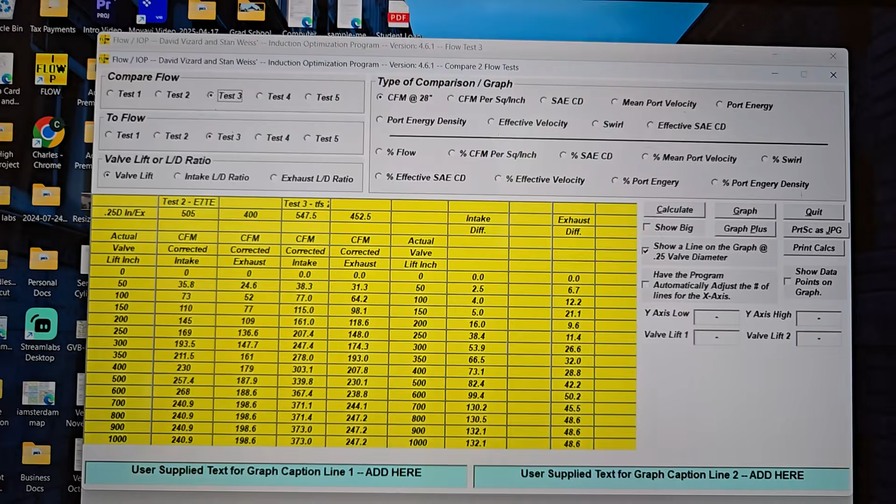Okay guys, we're going to go over Dangerous Donny's 540 TFS 270 CNC heads after I did a ton of work to them.

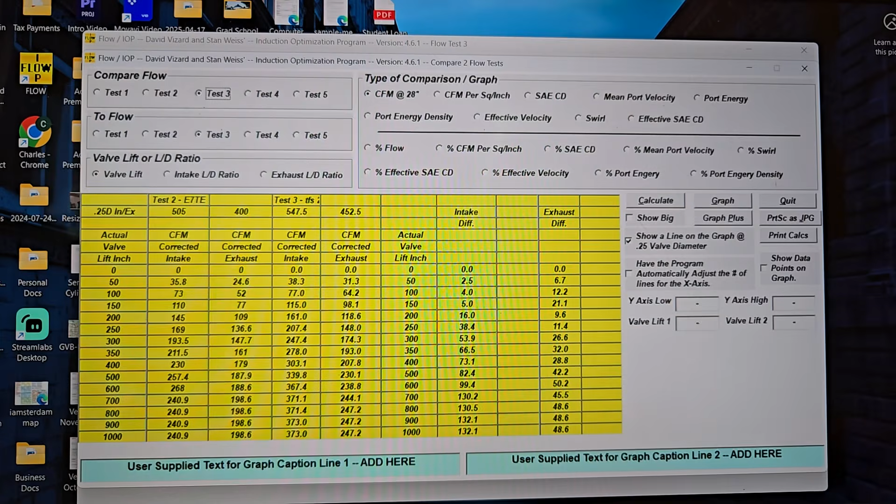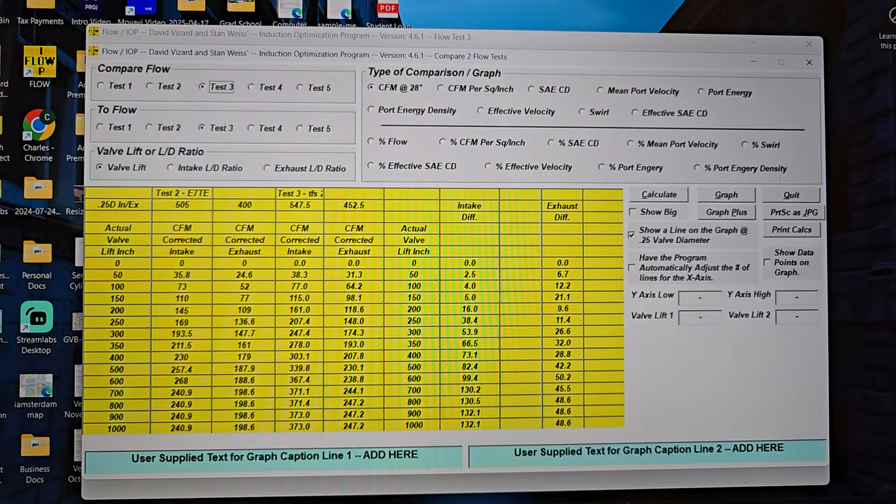I don't think I'm going to show you my page with all my measurements and details, but I just put a little too much effort into that to just give that away. But I will be showing you everything through David Vizard and Stan Weiss's IOP program, and if you're really sharp, you'll be able to get a bunch of info out of here.

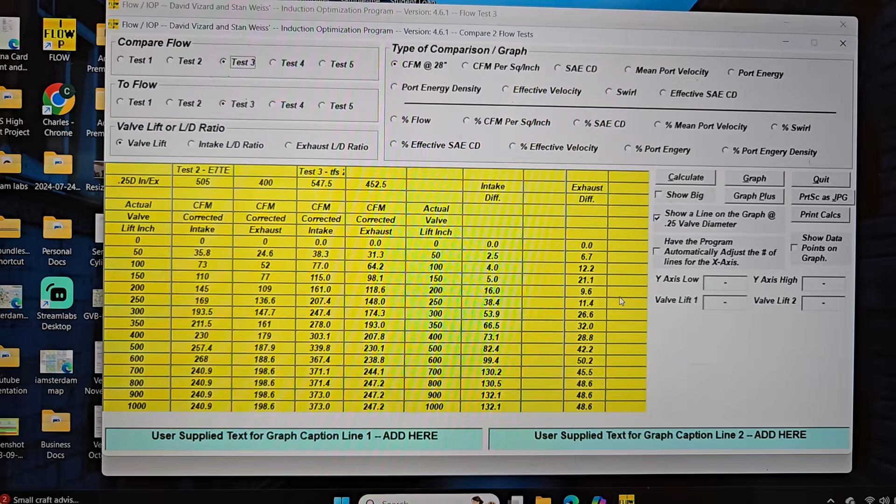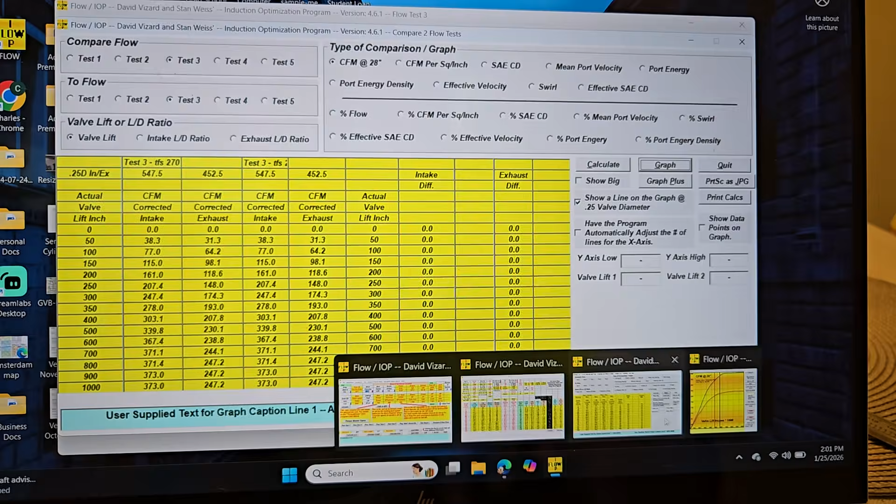So test 3 is Dangerous Donny's heads. We're going to take a look at CFM first. We're going to hit calculate, graph. Come on, you can do it. I think I have that page open already, that's why it's not coming up. There we go, okay, that's what we got.

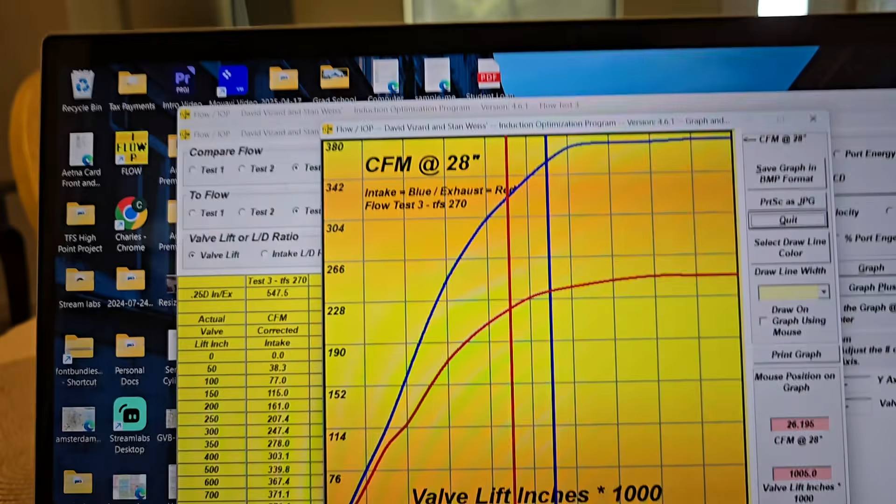And yeah, we're coming out. It maxes out at 373 on the intake and 246, 247 on the exhaust. Nice looking curves. Let's move on.

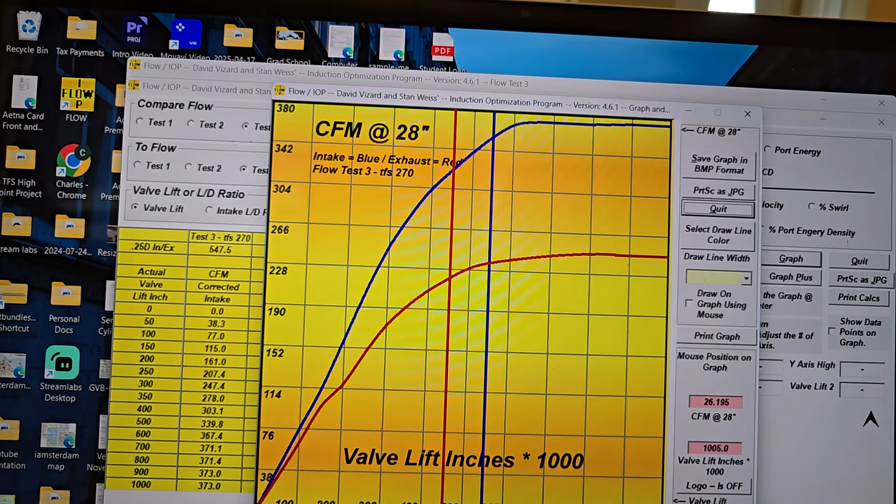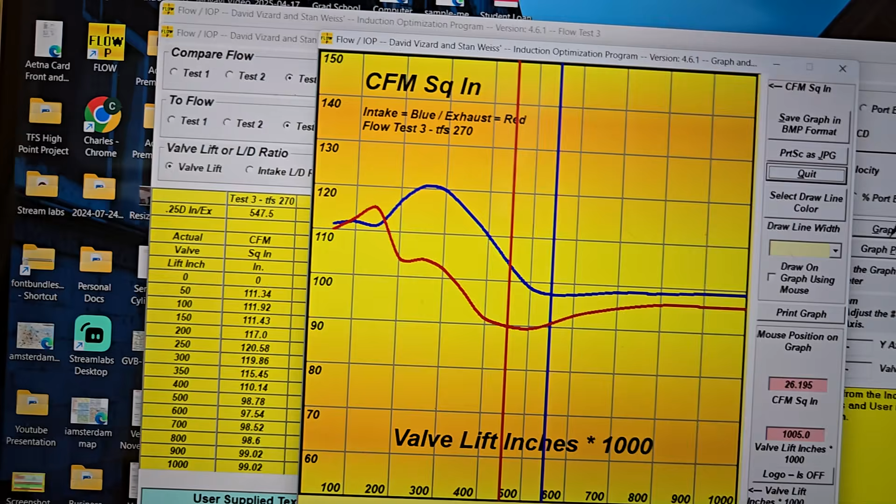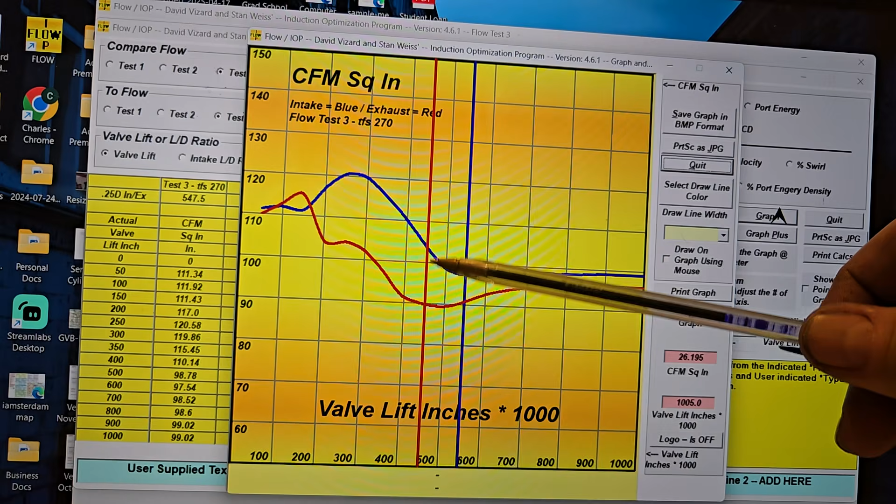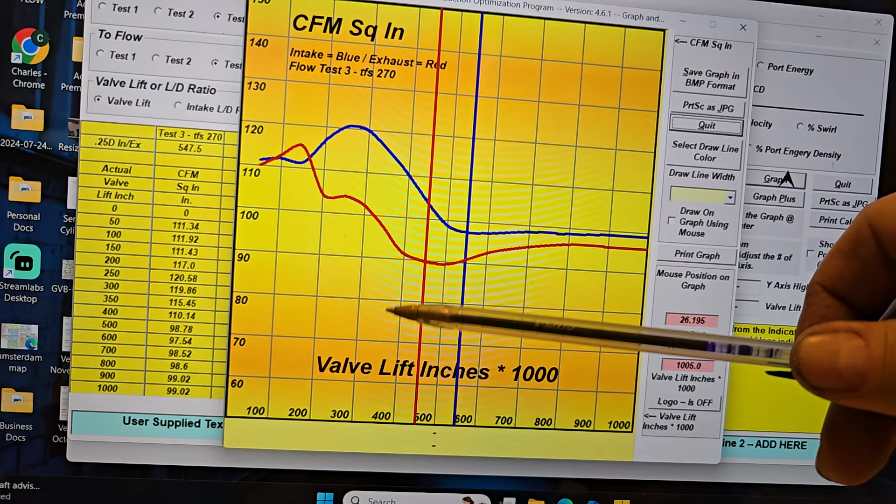CFM per square inch. Okay, that's going to tell us our efficiency. Anything over 100% efficiency is pretty darn good. We got a nice bulge between, we are over 100%, up to like 500 lift, right in the meat of the curve on the intake. We're doing really well. Okay, they do level off, but that's when the port's already becoming saturated.

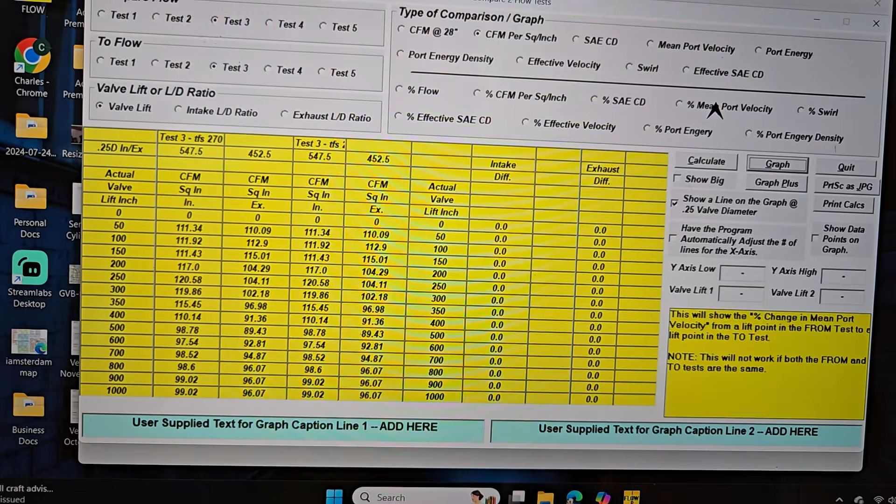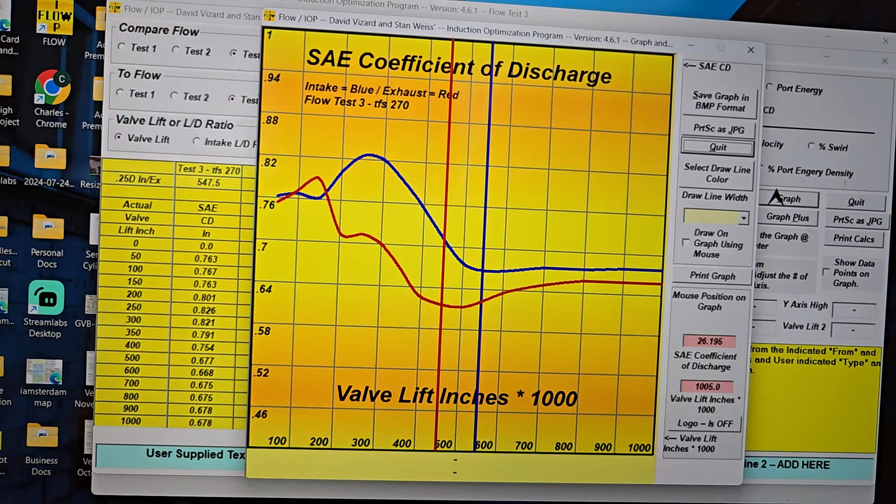SAECD, calculate, graph. Very similar curves. Intake turned out really well, the way I did the bowl and the seat, after I had some issues with it.

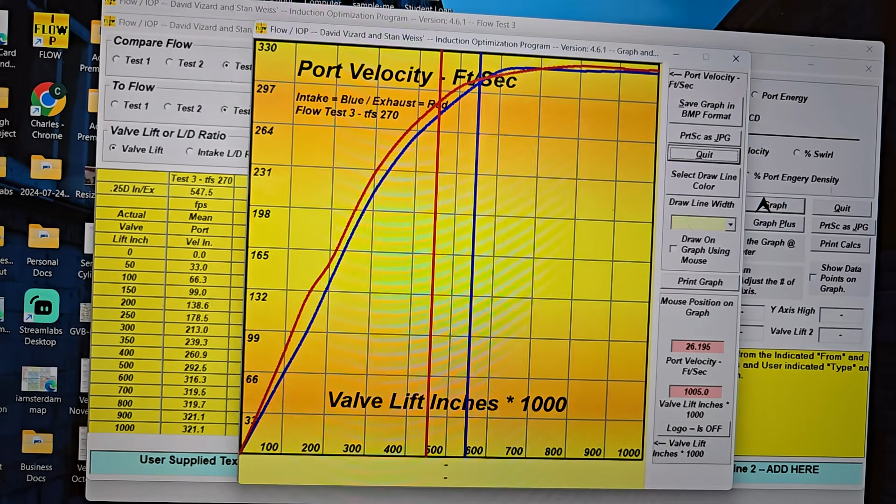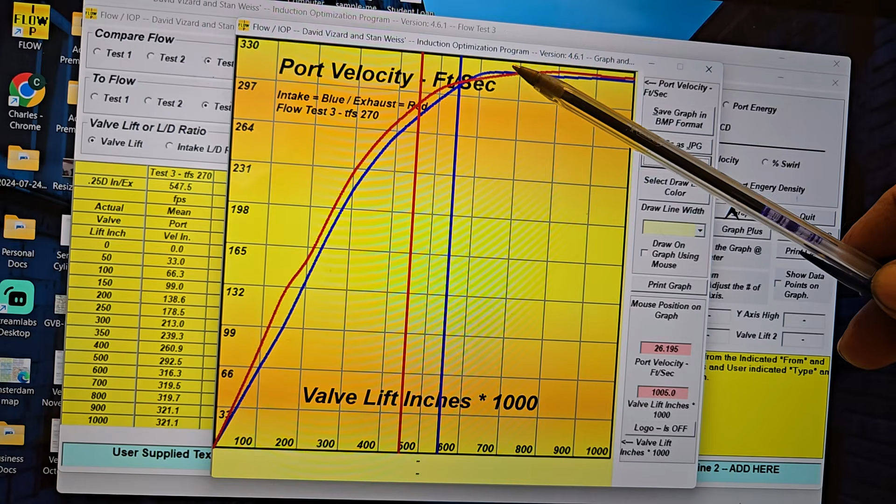Mean port velocity, this is pretty interesting. DV likes 300, 300 is here. We're quite a bit above that on both ports. Really good curves on both ports. Intake's a little bit fast because it's relatively small for this size engine.

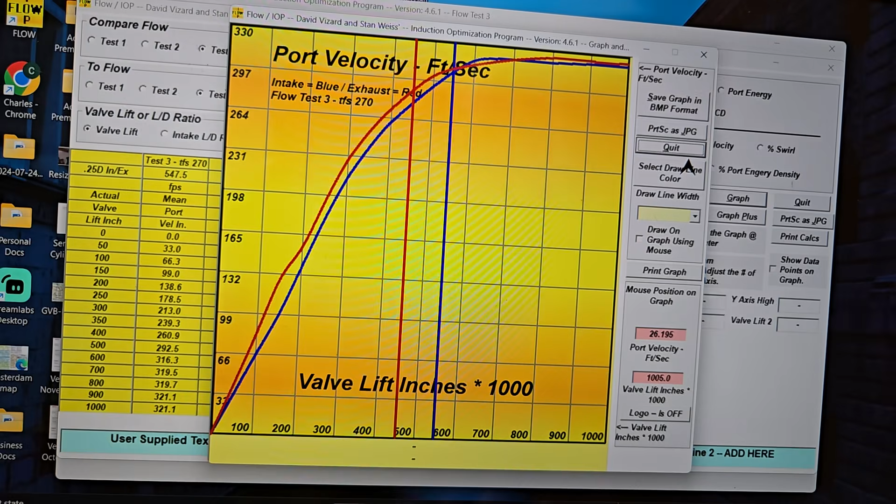Will that limit our top end? I'm going to say I don't think it's going to limit it as much as a lot of people think it will, because I worked on getting the airspeeds in the port pretty efficient even at high flows. So I think it'll carry, I think it'll carry the RPM. We'll find out.

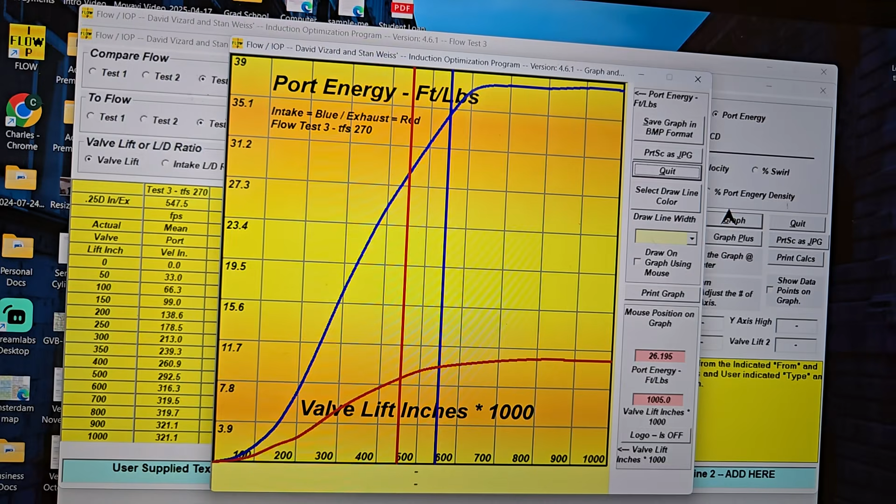Okay, port energy. To be honest, I can't remember a port that had 39 foot-pounds of energy per foot of port length. I'm going to guess that's good.

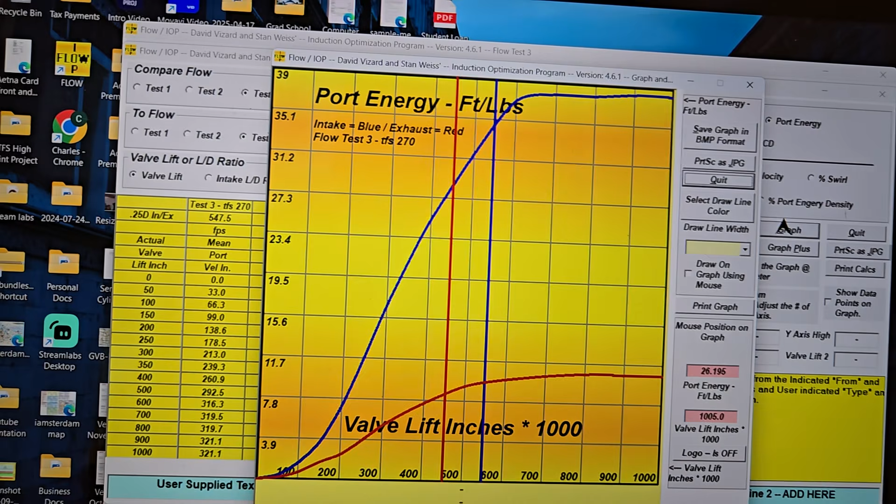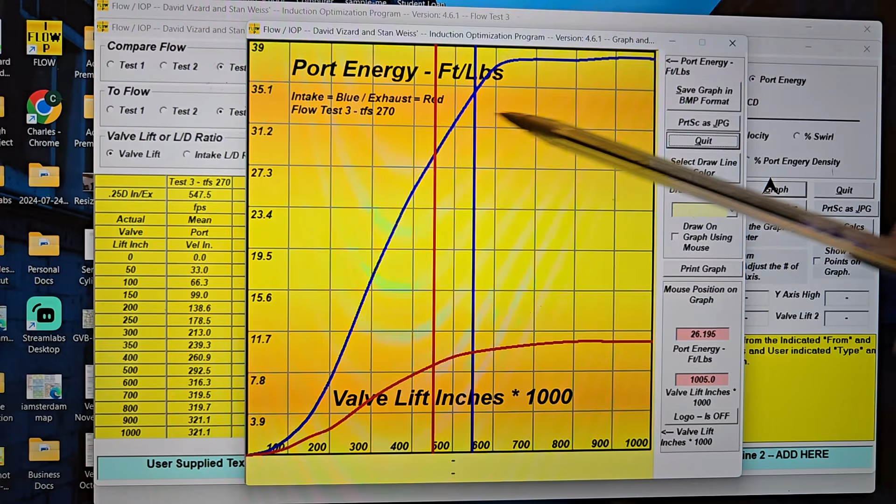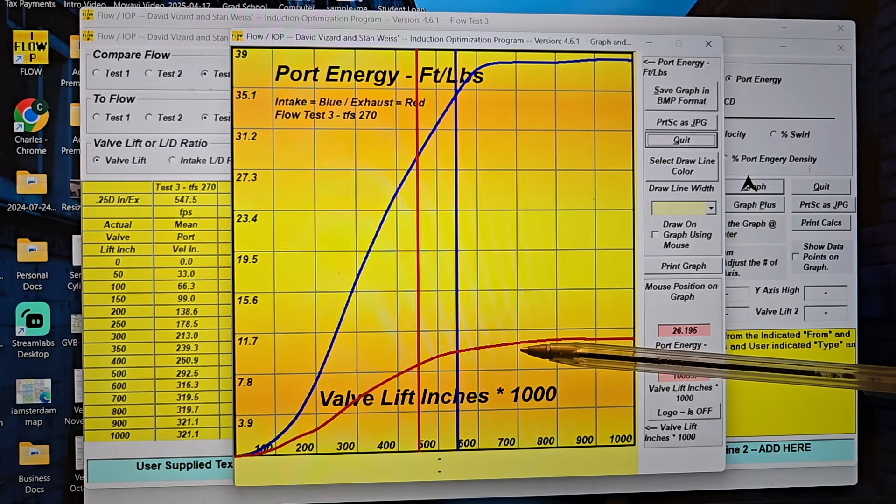I actually sent a couple of these pictures to DV, I want to get his input on some of these. You would think the exhaust would be higher, but the way the program seems to work, we usually get a port about twice the port energy in foot-pounds on the intake than the exhaust. Well, here we're almost 4 times. It's a little bizarre.

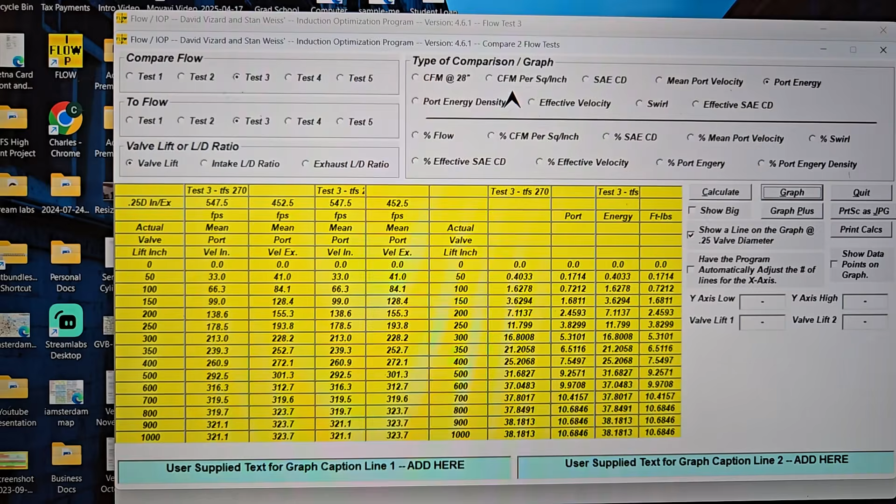All right, now we're going to take a look at port energy density, which takes the port length out of the equation. See how that looks.

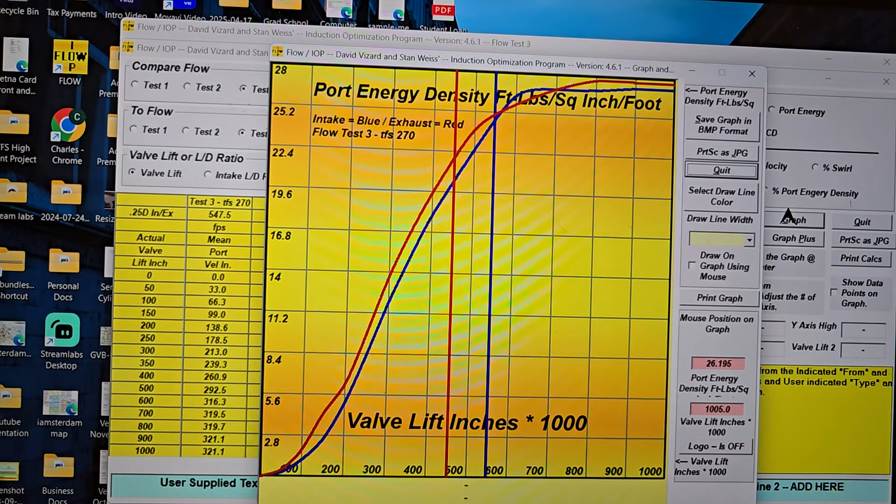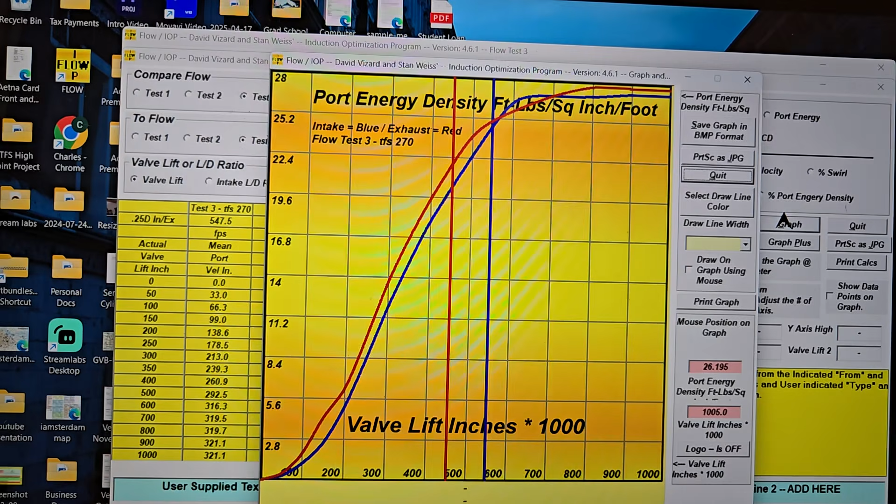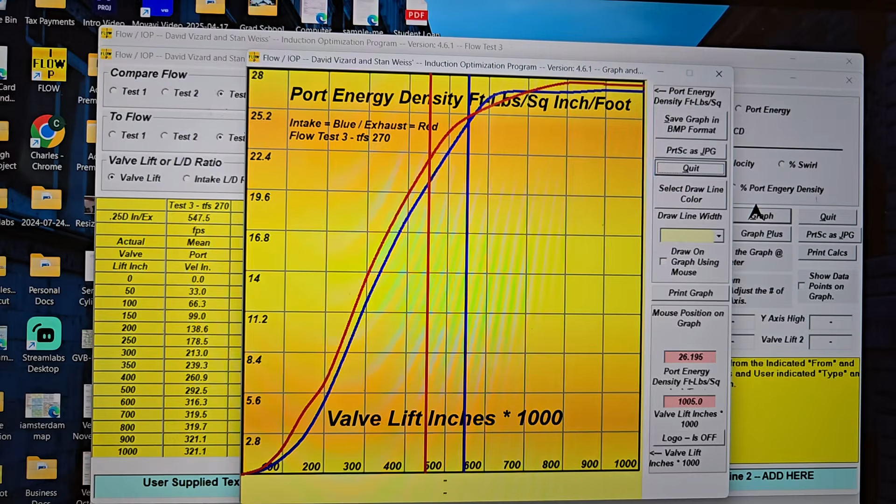They're right on top of each other, so they're both - if you take away the length of the two ports, right, the intake port's quite long, I think it's 6 inches, and the exhaust is really short, it's only 2.5. The port energy in both of those ports are right next to each other through the whole lift curve. I think that's really gonna - I think that's gonna work out really well.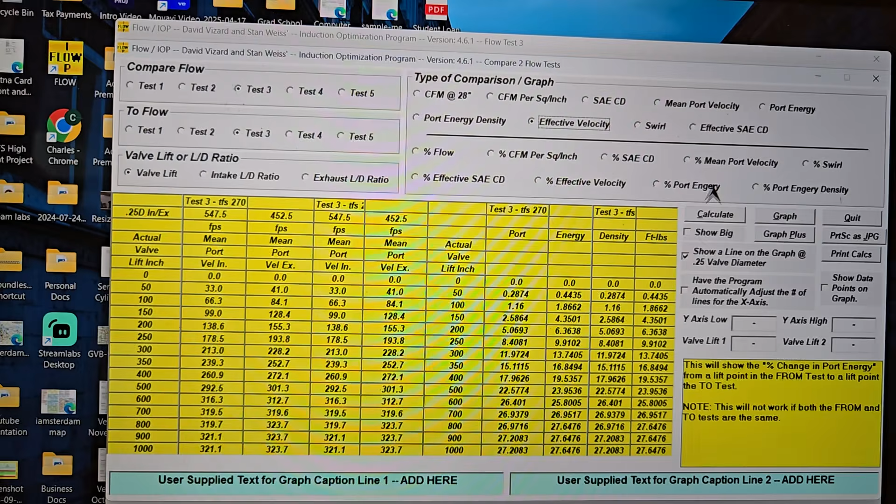Okay, effective velocity is airspeed at the valve. Okay, we're almost 400 feet per second at the valve. And then we dip down and we come back up. And then we're saturated pretty much at this point.

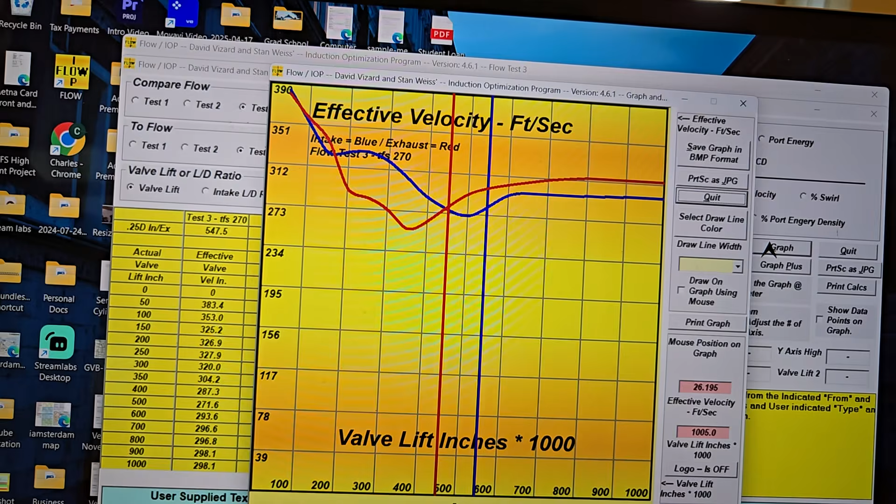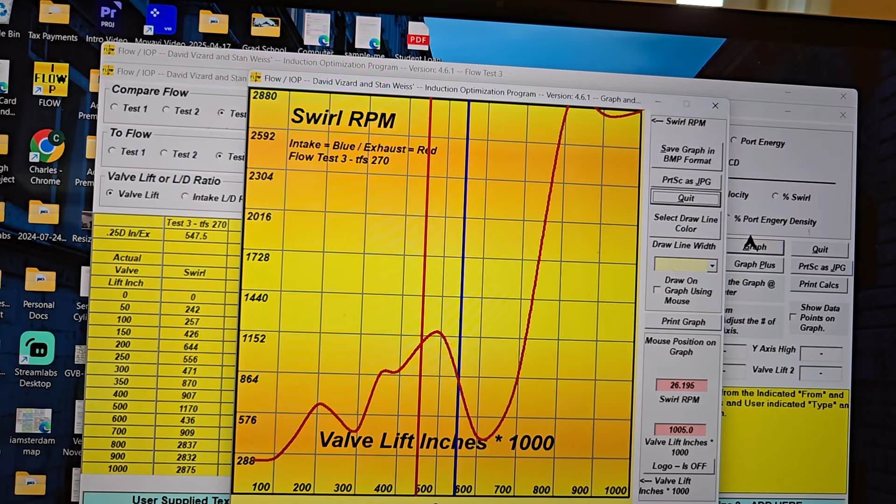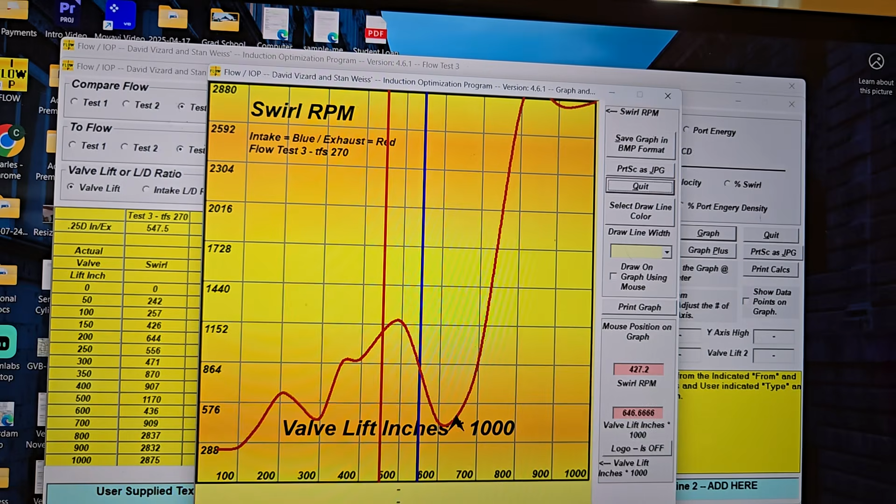The swirl curve is kind of interesting because it's fairly low, right? It's fairly low, I mean it's progressing decent, right? And then it takes off once it starts to lose it, right around 650 or so. You start to lose it on the short side. But if we go back...

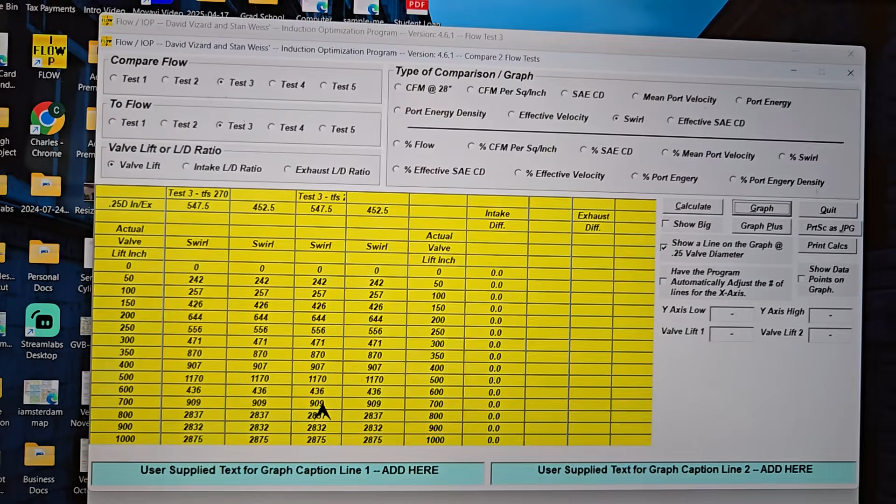To our page here with our CFM. Let's just click this for a sec. Okay.

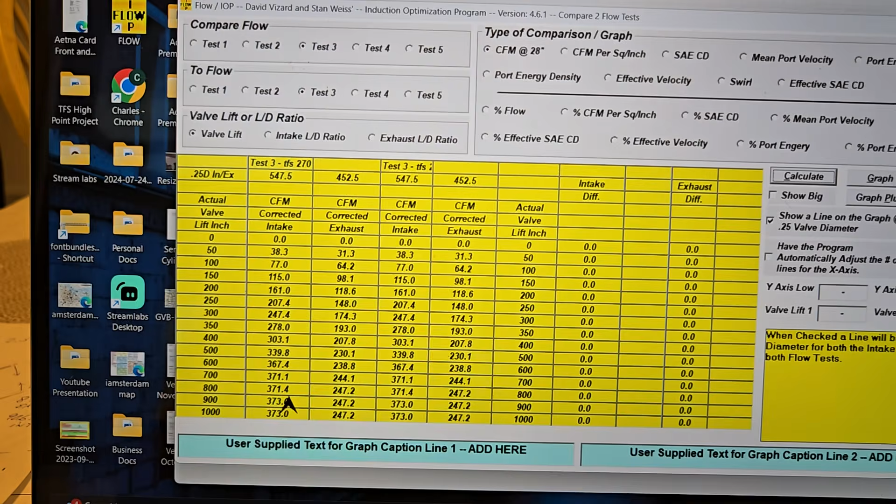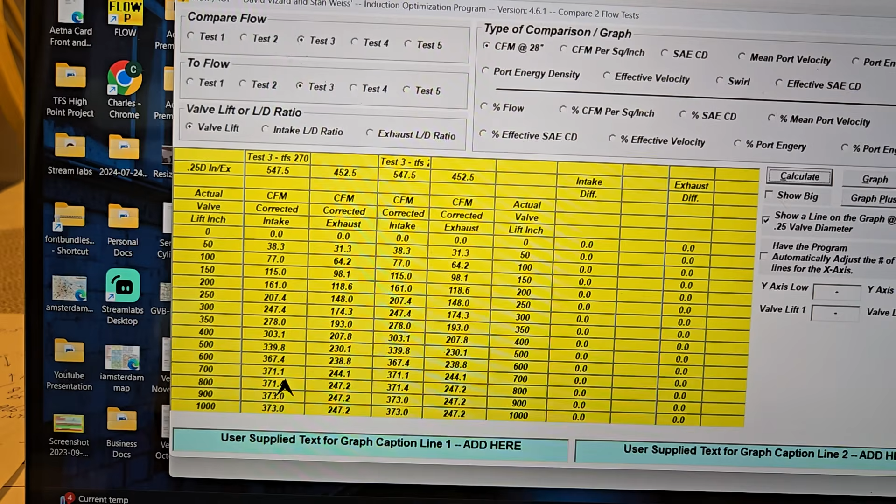We don't go down at all anymore. Now this is the same curve you guys have seen, but I brought it out to 1 inch. She goes 371, 371.4, 373, 373. That's really what you want to see - you want to see it keep going as it's lifting. You don't have any problems with going off the short side and dropping down anymore. I think that's going to let us push the RPM a little bit considering our minimum cross-sectional area.

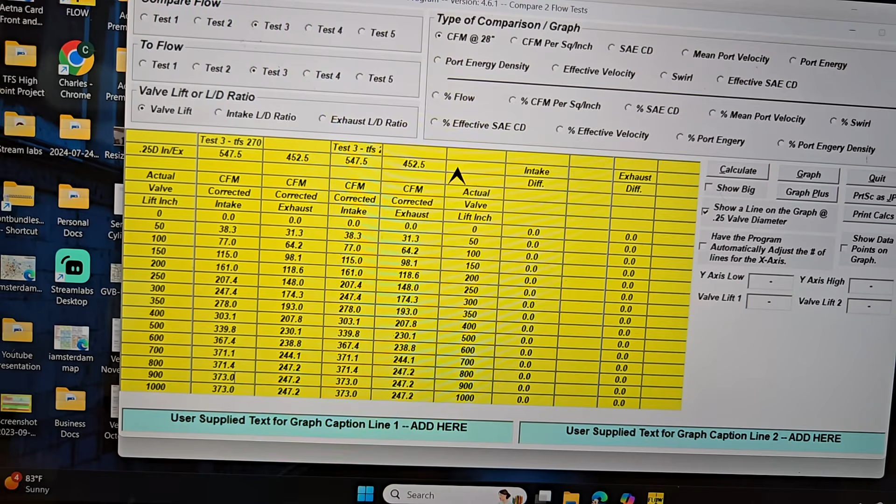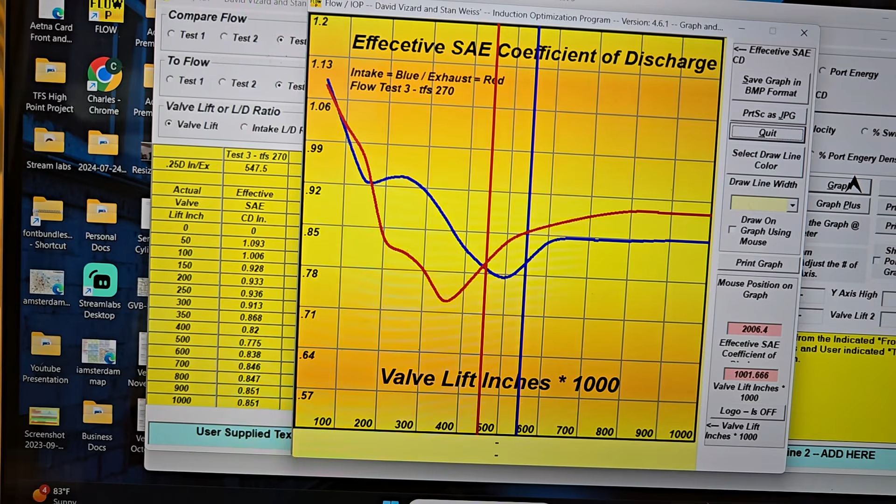Okay, let's do our effective SAECD. Okay, very similar curves to our effective velocity, right?

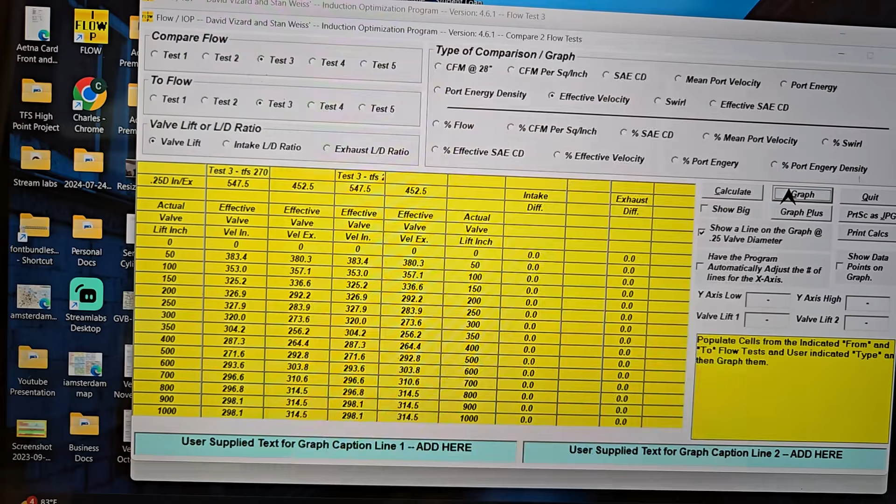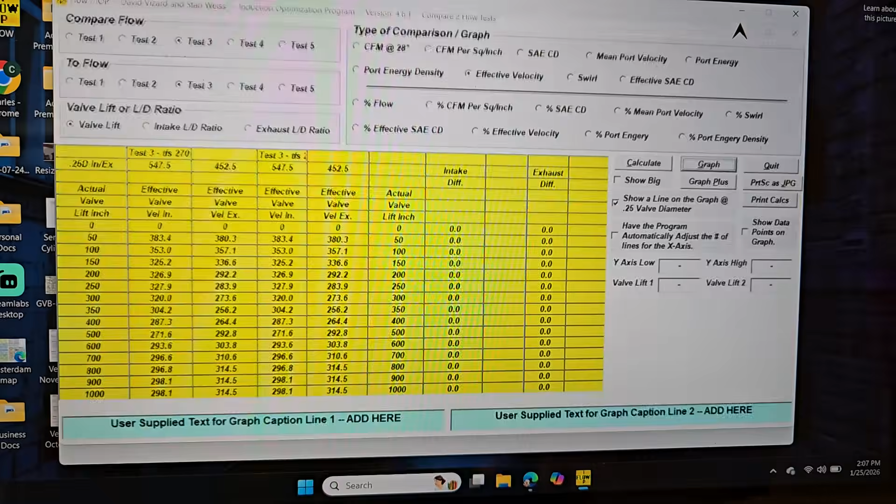Very similar curves. Okay, now we can take all of this info and go to a different page. Let's shrink this down. Let's go to this page.

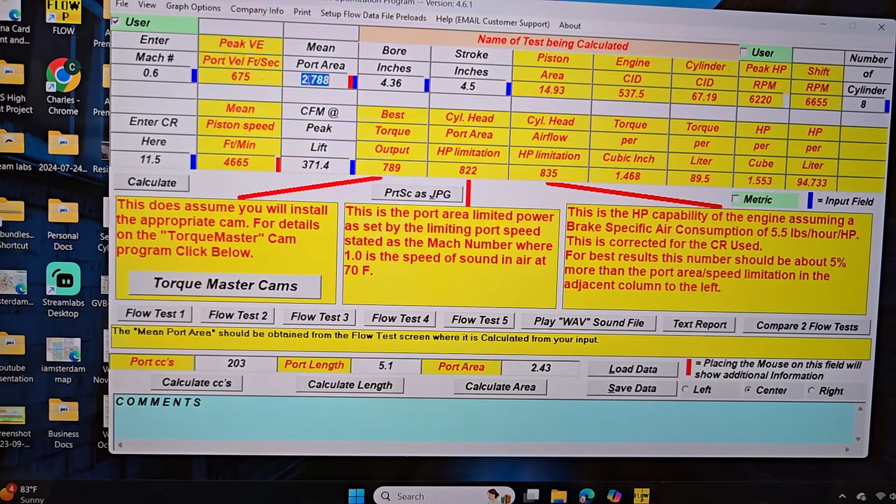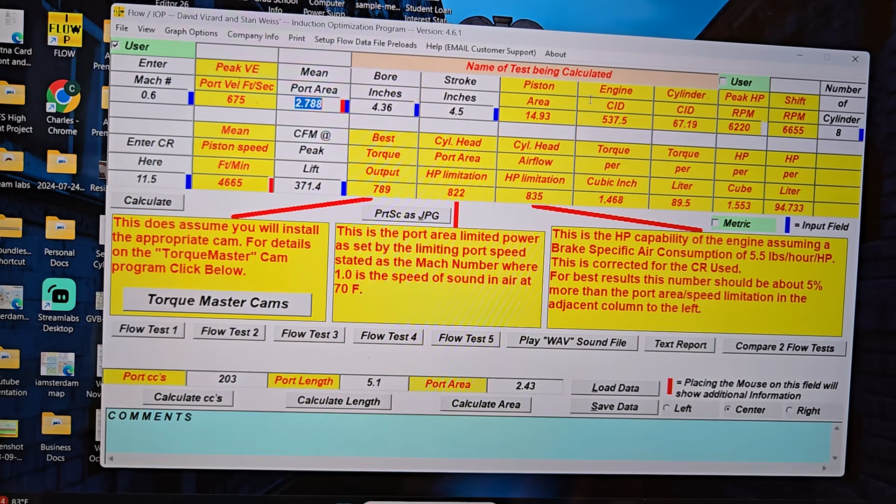Okay, mean port area is kind of small for a 540 or 538. I had to fiddle with it - I couldn't remember exactly what the bore size was. We were testing on a 4.36. But this comes right out to almost 538, right? So I think this is where we are.

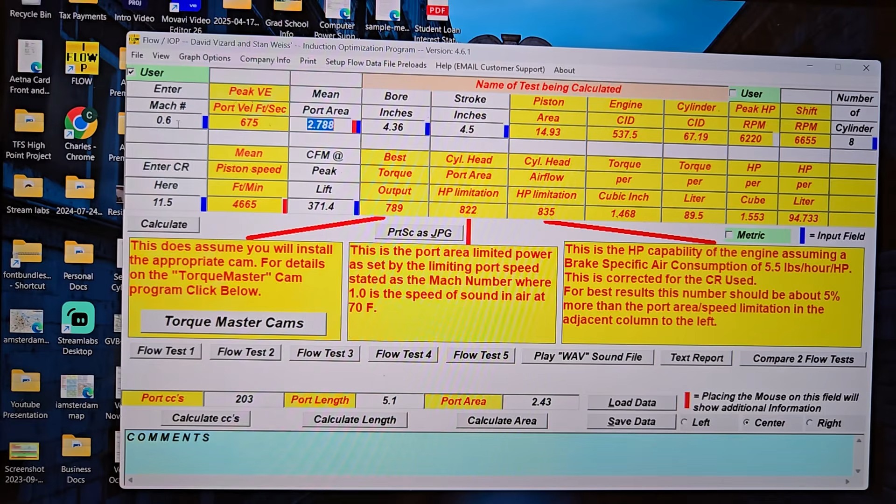I did increase our Mach number a bit. It's usually around 0.5. I think we can get a little more speed out of it than that. Does that actually change our speeds?

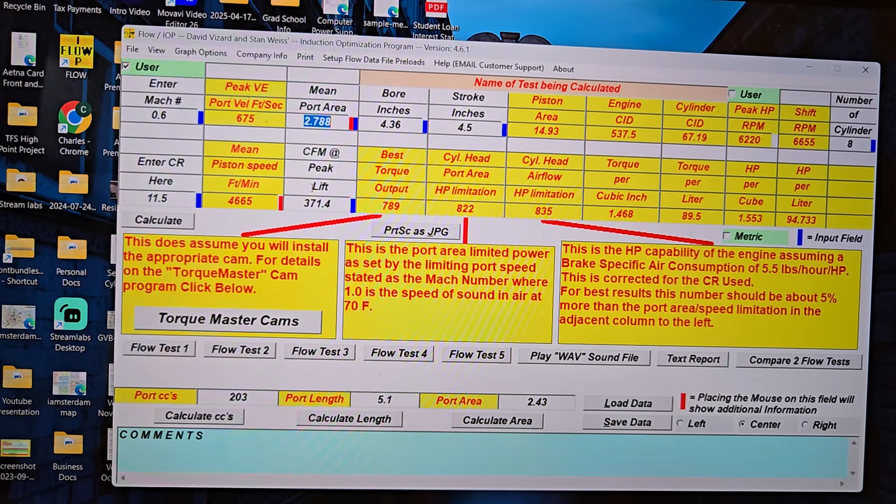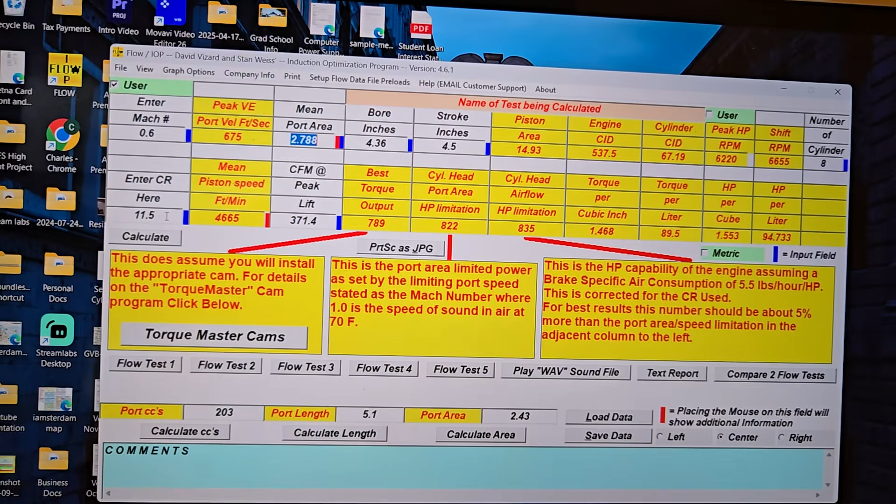I'm actually guessing a little bit on the compression ratio. I can't remember off the top of my head exactly what it's going to be, and they probably won't know until they totally button it up. But our mean piston speed is pretty quick.

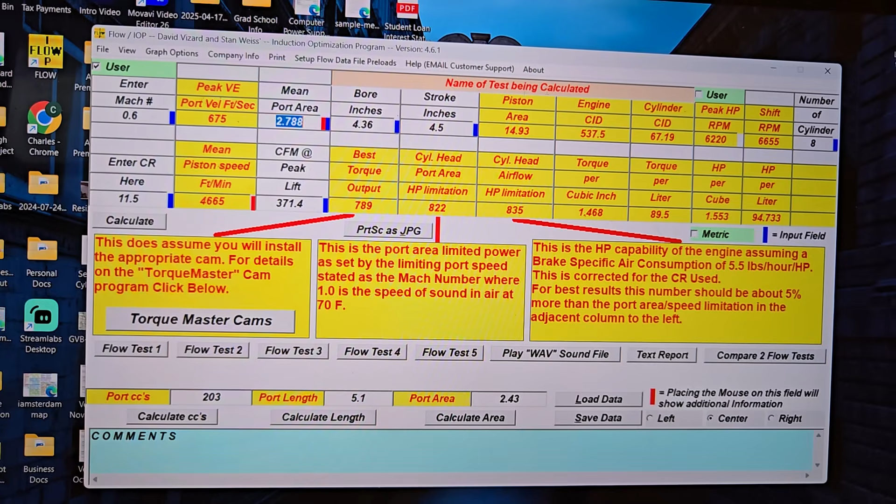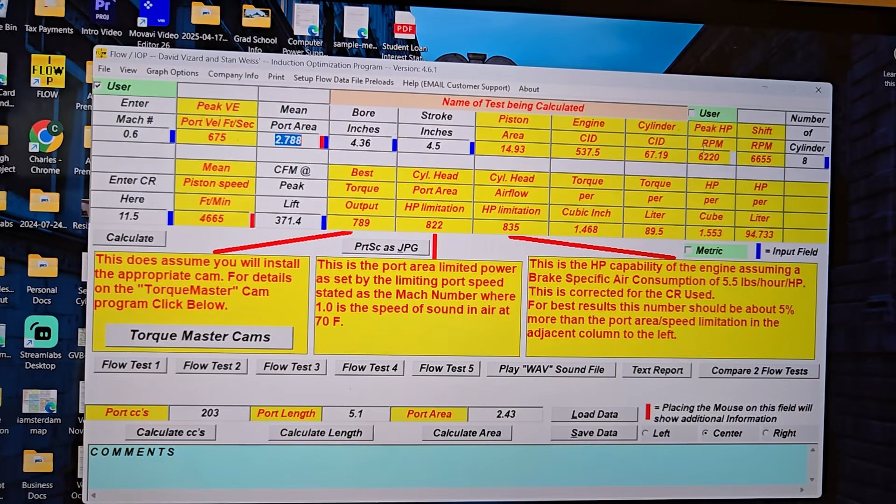Now I don't know if this is calculating this at shift RPM - that's actually a good question, right? I bet it is. I do expect it to peak out a little over 6,000. I think it'll carry to 65, no sweat, but I think we're going to peak out right around 6,000 RPM.

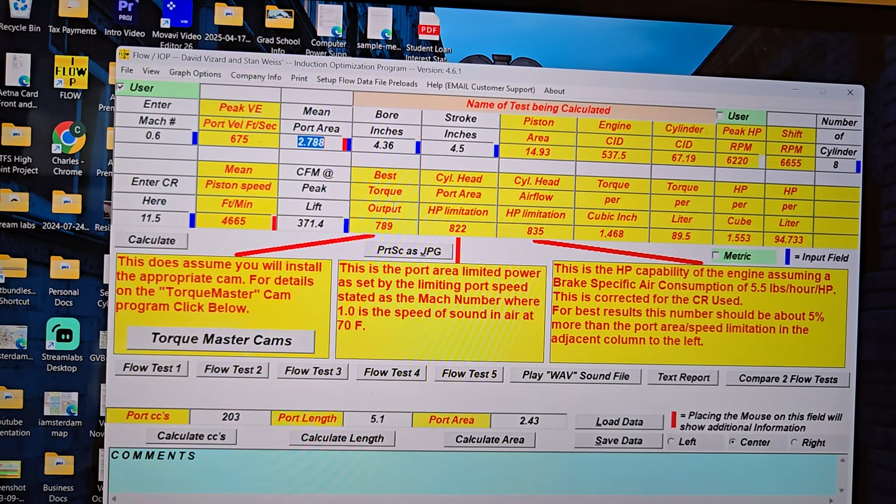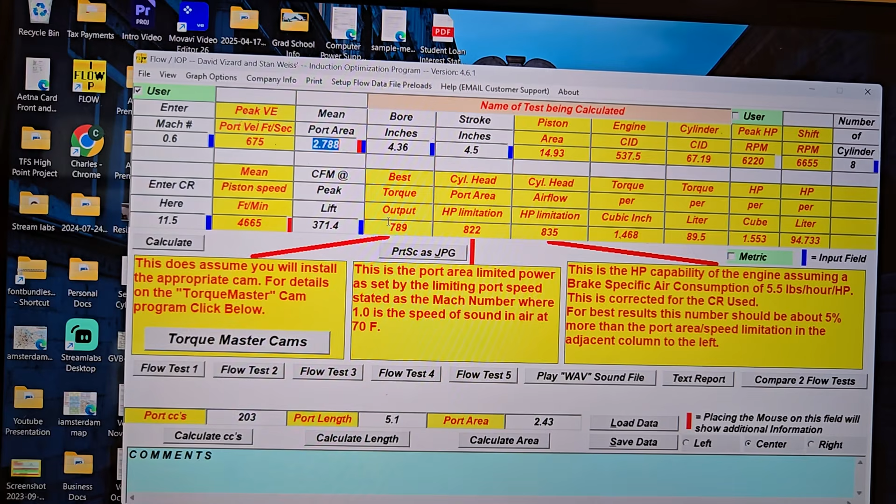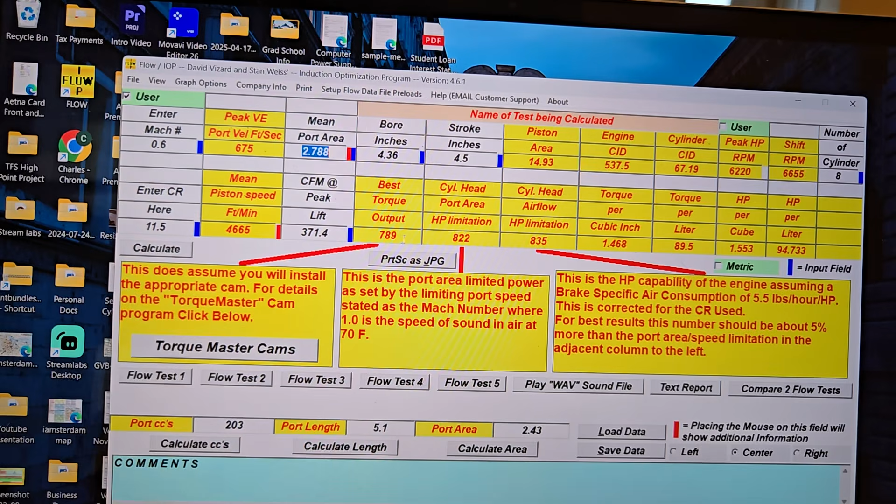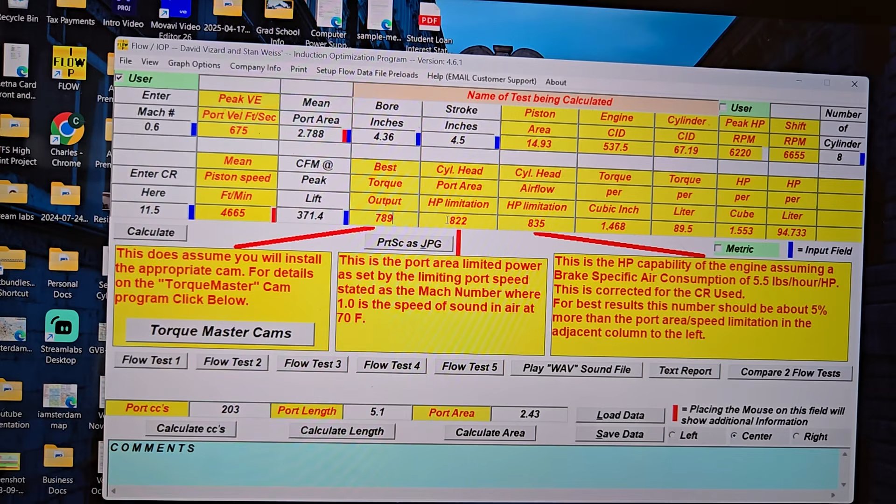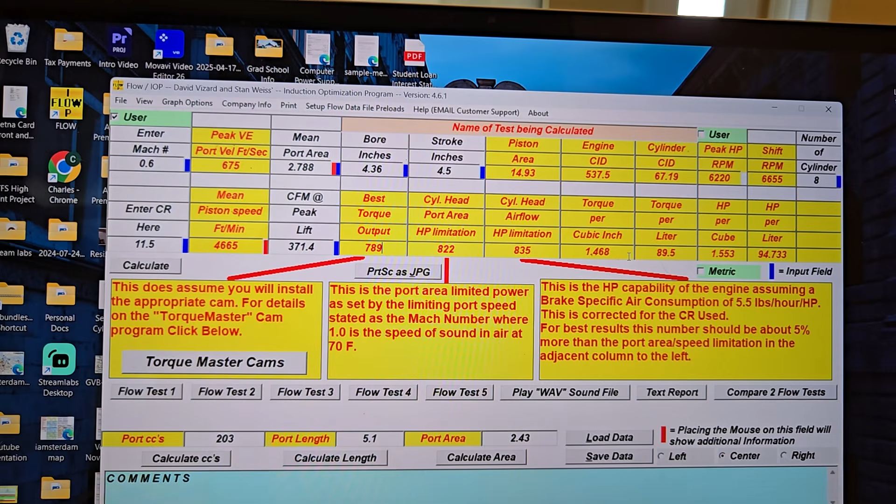Cylinder head port area horsepower limitation, 822. Cylinder head airflow horsepower limitation, 835. I don't think we're going to get this high - I really don't. I mean, I would love it if we did, but I don't know if we're going to. We'll find out. Torque per cube, 1.46, not bad. Torque per liter, 89.5, not bad. Horsepower per cube, 1.55, not bad. Horsepower per liter, 94.7.

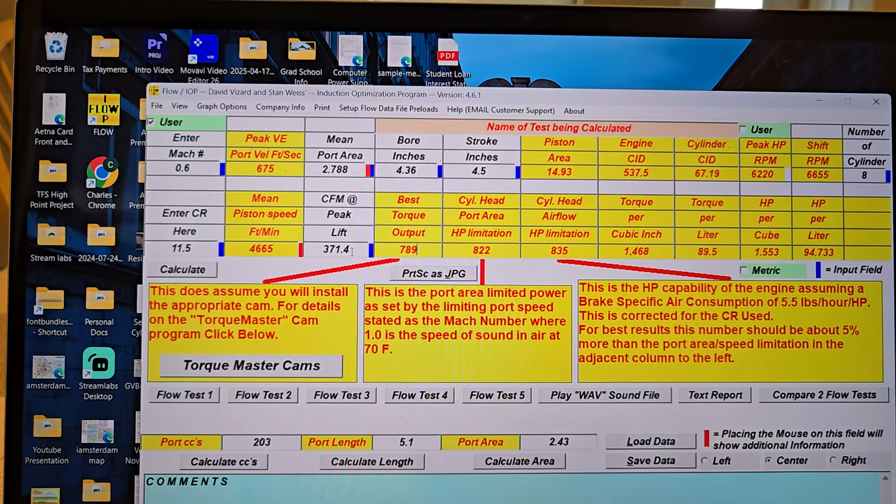All right, and that is going at a 371.4, which is pretty close to a 0.7-inch lift, right? I think that's where we were.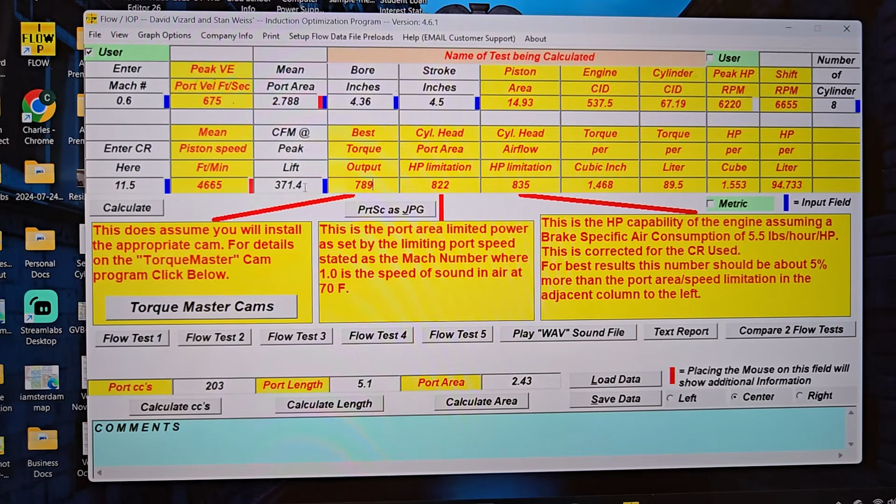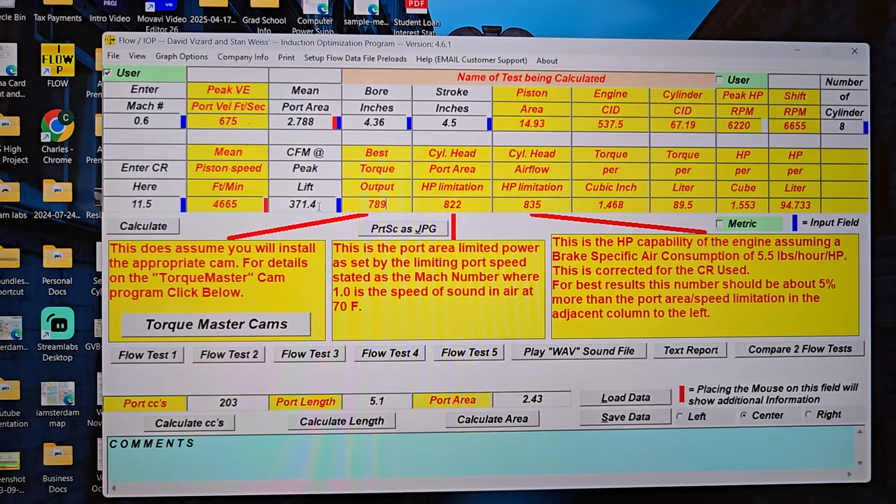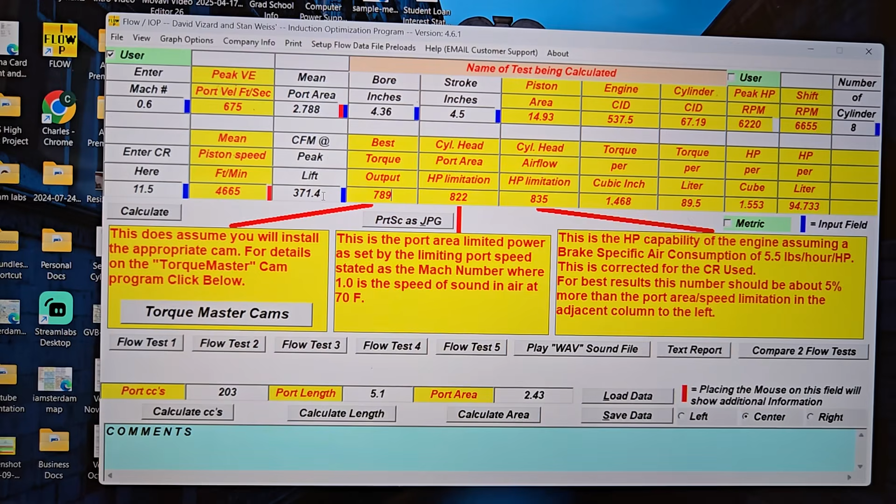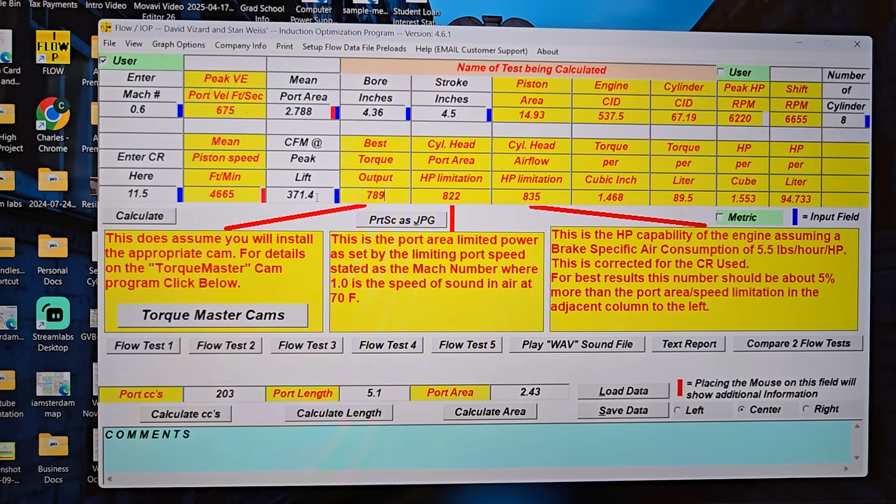All right guys, so we'll be able to find out how accurate this is when it's all said and done. Run the 3 different cams on there, one from Brian, one from Daniel, and one from David, and it should be real interesting. Now, I know I have a 950 carb for this. I don't know what carb they're going to be testing this with. What's your opinion on a 950 carb on this? Do you think that's big enough?

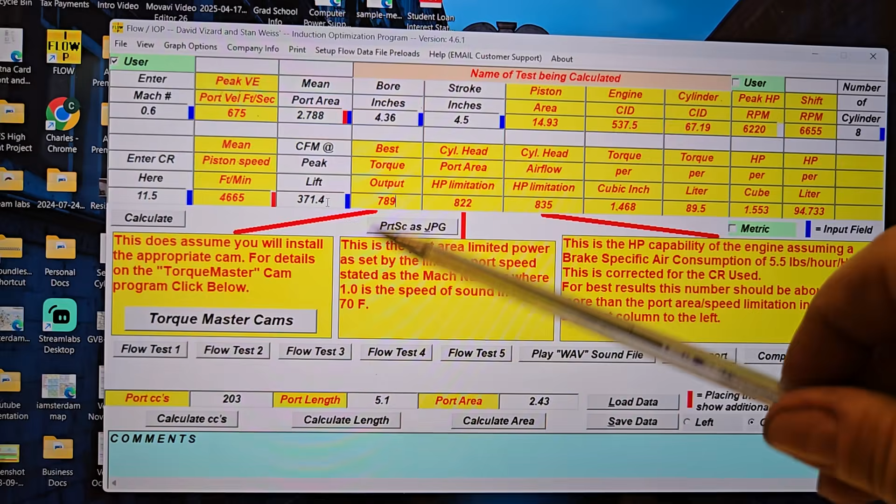All right, we should probably just make sure you guys read these, because you can't get anywhere close to these numbers without having DV's Torque Master Cam program, or have a Cam Pro figure it all out.

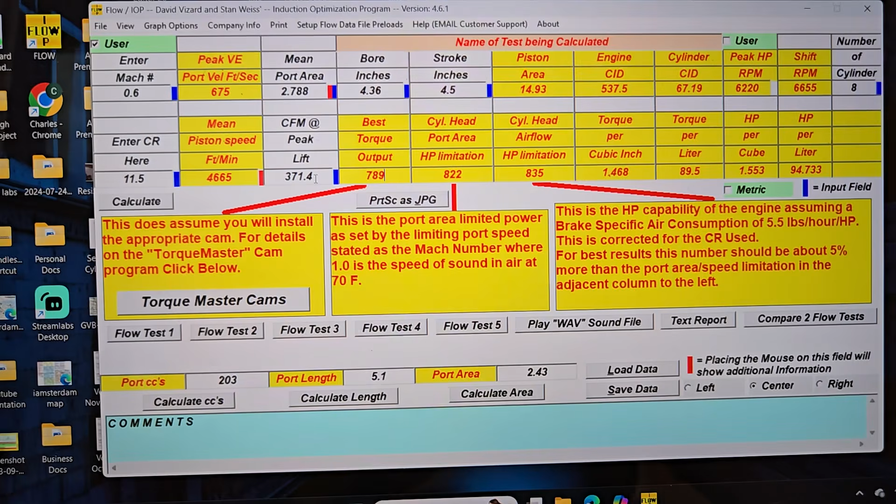All right guys, 11 minutes. I think we did all right with this. I can't think of anything else I need to do.

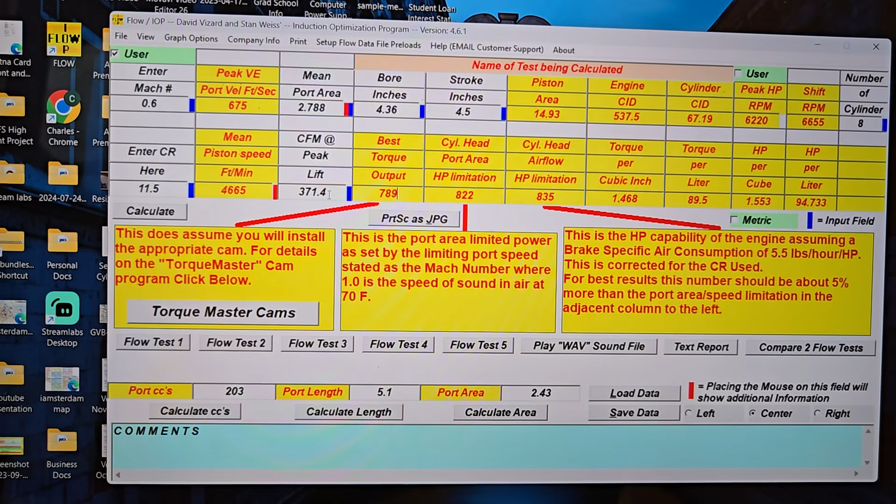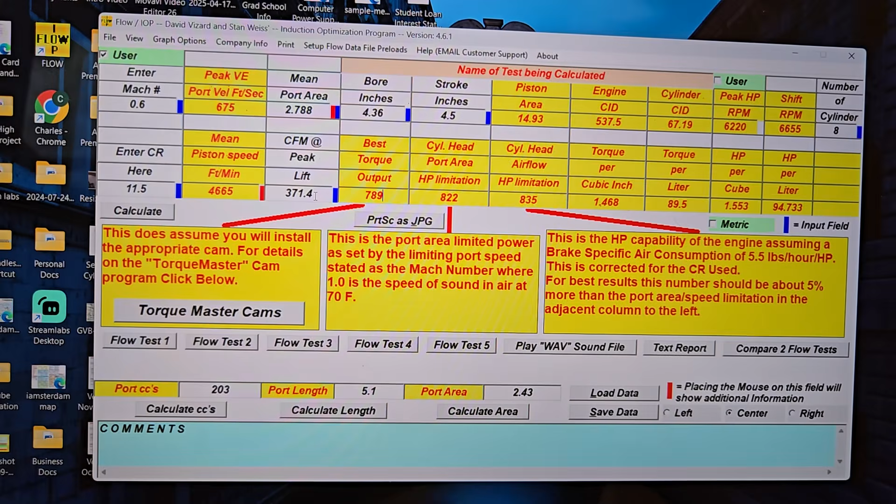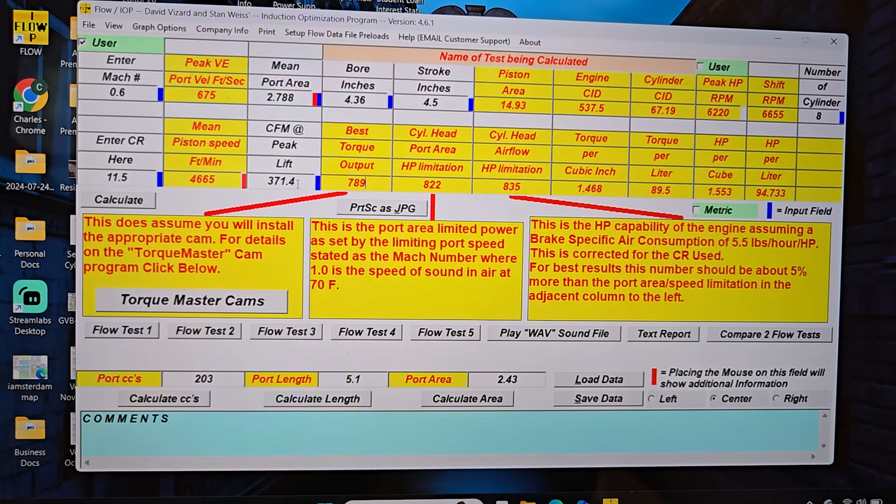I fixed a little bit of valve job - I had an issue with all of them. When I polished them, the chambers are now set with a light texture around the intake, and the rest is all polished. I think I will just go through and check, make sure every seat concentricity is where it's supposed to be, because I'm pretty sure I did that when I first got them, and they were pretty good. I don't remember if I had to just touch the seats or not, but I won't let it go out unless they're in pretty good shape.

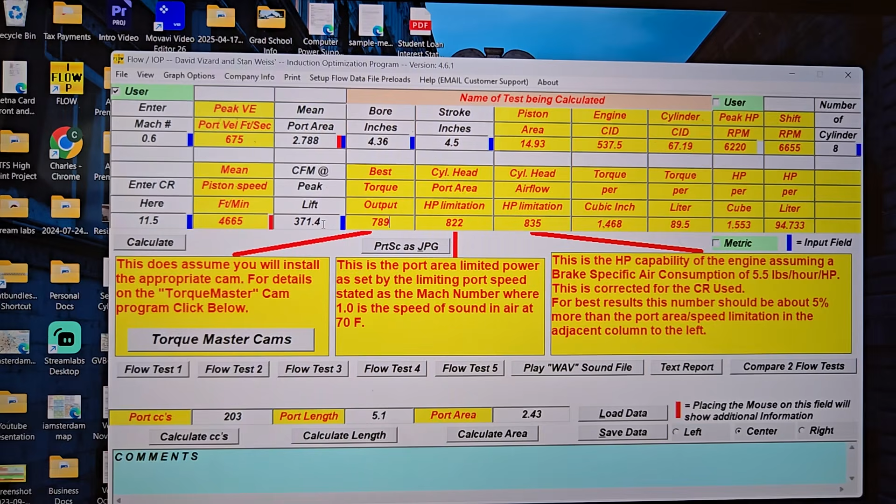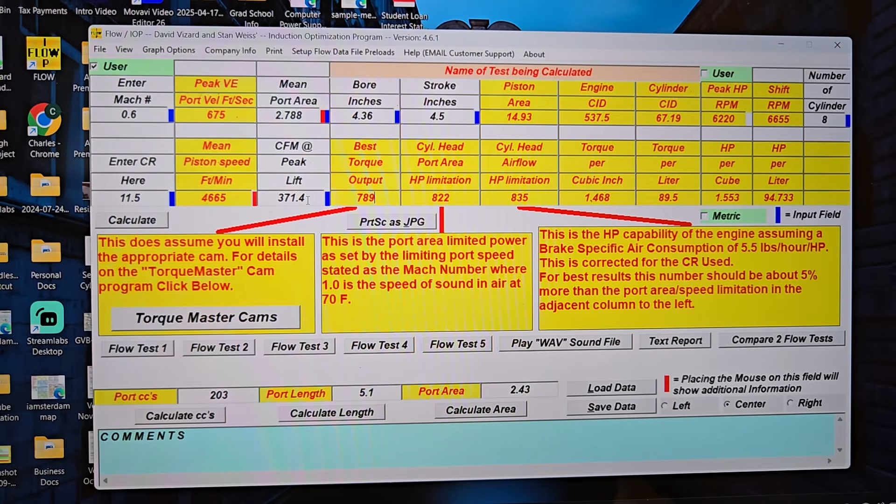If the customer wants me to go through and test every single port, he can get in touch with me and I can do that. That is an extra, but it would be interesting to see, because all of our flows are pretty much on port number 1, and they should be extremely close port to port, because I spent a lot of time making them even.